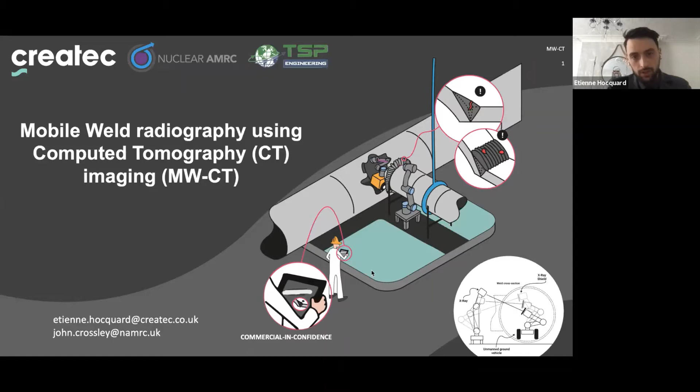Before we get started, I'd just like to introduce a bit the partners in the project, because it was a very close collaboration with AMRC, Nuclear AMRC, for their expertise in NDT and manufacturing. They've participated in the project to provide a set of samples with flaws in the weld - we're talking about weld inspection here - and they've provided all the expertise within the project. We also collaborated with TSP Engineering based in Workington for their very long experience in manufacturing of very high value pieces, particularly for nuclear and all the new small reactor builds and others. They provided their expertise and acted as an end user to the project, and also provided a facility to operate X-ray equipment, which we will talk about in a minute.

Before we get started, also a little word on Createc, who we are. We are a small business company based in Cockermouth, about 30 people, and some of us may know us for this instrument, which is measuring and mapping radiation. We've sent that to places all over the world - it's now one of our core products. But what Createc really is, is a group of people trying to do research and development and innovation for business. We're looking at the problems of the world and trying to come up with new ideas and put those ideas together to make things happen. We've started doing more and more robotics, and that's what we'll be talking about - combining our instrumentation expertise with robotics as well. We're trying now to deploy more and more of our sensing technology and using robotics to act in the world and innovate.

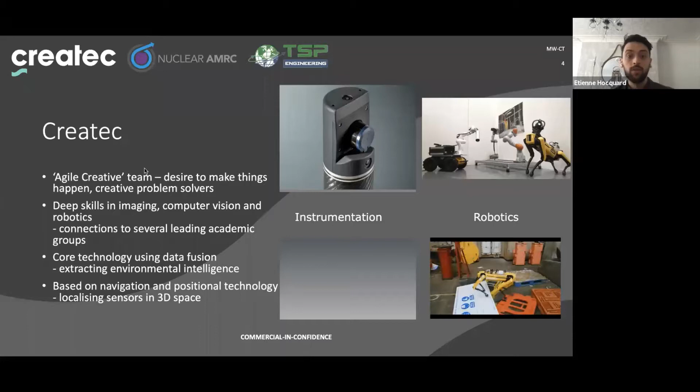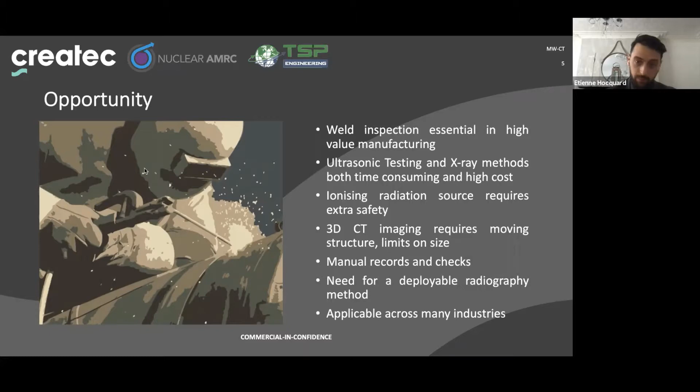So today's presentation is about weld inspection, and really the opportunity came from: how can we make it different? How can we make it better? We've got all those new builds everyone talks about, small reactors, the current build as well, and weld is such a critical part of all this technology. At the end of the day, the quality is very important. And the current technique as of today, which is ultrasonic or simple X-ray imaging, and all those techniques are limited in a way - limited in the sense that they are very disruptive to the workflow. Either you use ionizing radiation and you need to take your workpiece to a specific place, or the other way around - you need to stop all production on site and get people outside of the workpiece so that you can use ionizing radiation to analyze your weld. Or as John from AMRC will highlight, you can use other techniques, but they don't necessarily highlight all the flaws you can find in welds. So we thought, well, maybe we can do it differently, and since it's such an important part of our workflow, let's try to rethink it and see with our knowledge and technology how we could make that different.

So we proposed that project for what we call in-situ deployable - that's a concept again, but the idea is to provide a solution for which we can do CT directly on the workpiece, safely as well, with a robotic solution.

For people who aren't aware, with CT you can get X-ray images where you take a simple 2D image of a weld, and then if you take multiple angles, you can have a 3D reconstruction, which is a CT scan. Everyone's probably aware of CT solutions for brain scanning, for example. It's exactly the same thing here.

So how can we use robotics to provide CT scan directly on the workpiece without being disruptive to the production line? With greater, more controlled safety, which is a gain in productivity, but also being able to provide digital evidence for welds, because at the moment a lot of that is paperwork. We were talking with ONR not long ago, and when ONR or such organizations have to trace a big problem in a weld, in the nuclear industry in particular, but welds can be found in submarines and all sorts of places, when they have to trace back the information, it's all paperwork.

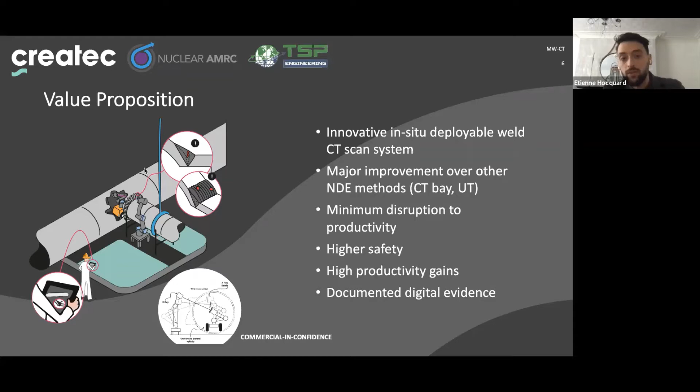It makes the process very complex. So with using digital technologies such as robots and scanning solutions, we could provide very good digital evidence that any end user could give to their customers directly with a weld, such as TSP Engineering, for example. If they were to use such technology, they would do their weld, scan it with the technology, and provide strong evidence of the quality met.

So how did we do that? Well, it all starts with robots to start with. Here's the robotic system we've put in place. I'm going to run through how we approached that problem, how we did our testing, and what we've designed.

We started with robots. You can see this robot, for those who are familiar - they are not big industrial robots, big scale industrial robots. We call them collaborative robots. They've got a couple of advantages for us to use, and that's what we had available at Createc. One of the advantages of collaborative robots is they're designed to be safe to work alongside humans, which means they're also safe to work alongside anything, because basically they stop in case of any collision.

They've got force measurements in all their joints, etc. So if you were to think about deploying such a system on a workpiece on a shop floor, you would want this kind of feature. You do not want to put a complete robotic cell around your workpiece to then do your CT scan. Using this kind of technology made sense to us back then, and we wanted to use that.

However, that's one of the limitations we quickly found out within the project using those robots. They are all well and good, they're safe, you can operate them without any safety fence, and they will stop if there's any collision, which is very useful. But they are very limited in their payload. This KUKA orange robot you see is limited to 14 kilograms, and that's more or less the biggest you would do with a collaborative robot, because then it starts to be difficult to stop in time to not hurt any operators or whatsoever.

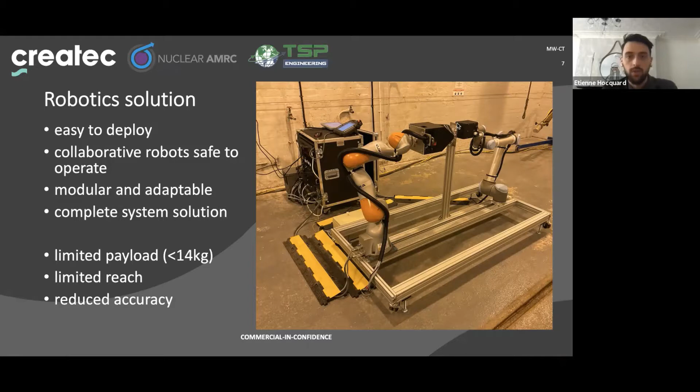So that's the robot part. Then on the X-ray, obviously, to do a CT scan we need X-ray. We need to be able to fire an X-ray onto the workpiece and analyze that afterwards. So we've used this equipment from AMRC.

It's a 130 kV maximum voltage output X-ray node. It's a micro focus type, so bear in mind you get a focal spot size of 5 micrometers. It's tiny, almost like a laser beam.

So it's not spreading. One of the ideas of this project was to try to think of the safety we would have in the future and try not to scatter radiation all over the place. Because if you want to work alongside your operators, you would want very limited scattering of X-ray. So for that, we designed a little collimator.

You can see here, in the hope that we could reduce the radiation scatter. Unfortunately, we didn't have time to test that. This project has been, as everyone has been, impacted a bit by COVID and our ability to do all the experimentation we wanted to do. But we've designed a little collimator, and in the near future we hope to be able to measure how much we're scattering radiation.

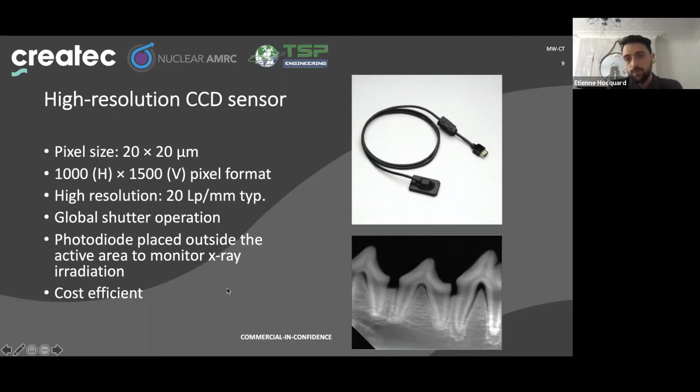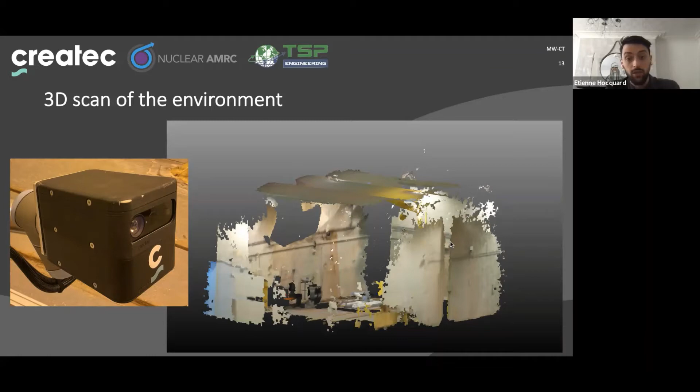Being able to 3D scan the environment for a robot, and for a robotic solution you're deploying here and there in different places, is extremely useful, because the robot must be aware of the environment and its surroundings in order to avoid collision. But the robot should also provide scanning of the workpiece so that the operator can go and select...

Imagine you've got a very long workpiece, 1 meter or 2 meters of weld - you're not going to do everything in one go. So you scan the environment. That's how the process would go: you scan the environment, and once you get your scan, the operator would come and say, 'Oh, I want to scan the weld from here to there,' and the robot will automatically compute all the necessary motion to go and scan that weld piece.

So some mild result on that - the sensor we've been using, which is an Azure Kinect by Microsoft, which is widely used in the industry all over the place for 3D scanning.

It's quite brand new. It's quite good at mid-range, but you can see here at close range, it's a low resolution for us, which is a bit of a problem. So you would need to combine such technology with another type of sensor or with some cameras, etc., to provide very good 3D scanning. But 3D scanning wasn't the purpose of this project. It was there as an example of demonstration, but it's quite well covered in the literature. So we didn't push that technology so much.

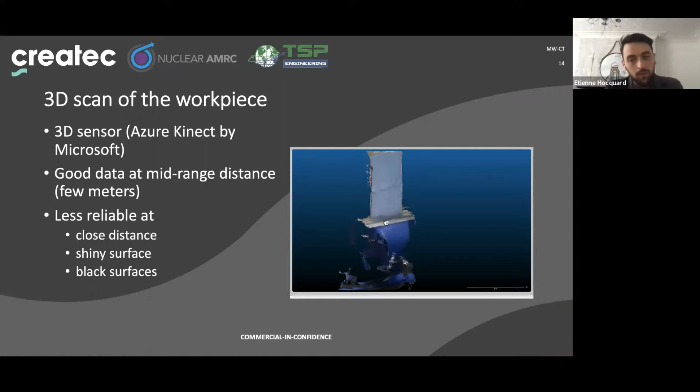So we're dealing with welds. It's little details, but it's quite important when you want to make products. A lot of welds are very shiny, for example, because people are grinding the weld and metal is grinded and polished on some occasions. Because these 3D sensors are laser based, it's not very good for shiny surfaces. That's why we believe it should be combined with other types of sensor to give a very photorealistic option to the operator, so that the operator can see exactly what part of the weld you want to scan.

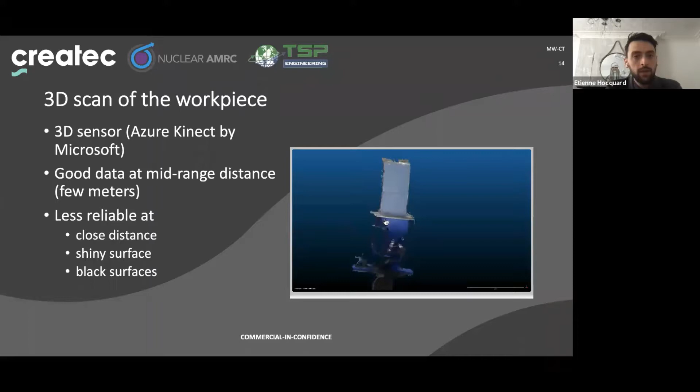Robot calibration. One of the important parts of that project was to get the robots to do synchronized motion, because you want to do a CT scan, right? So you want to go all over your workpiece, and it may sound natural: oh well, they're mounted like that, so they know where they are relative to each other. But that's not true. Each robot is not aware of the other robot. So if you want to make sure that every time you do a motion they align, you will need to make sure they are synchronized and calibrated well.

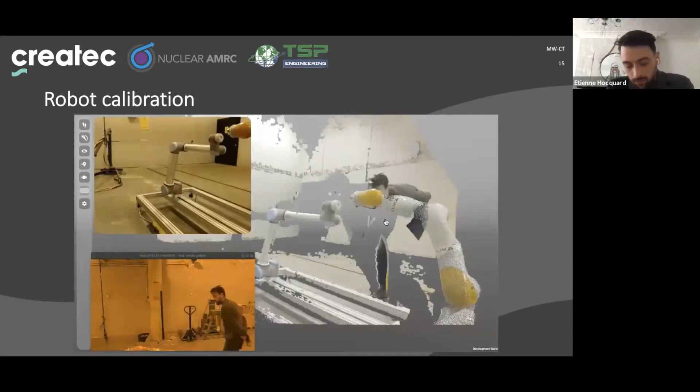There are a couple of ways to do that, and we've used a couple of technologies. One simple solution, which is quite efficient, is to use that 3D sensor to scan the part. The other solution, which is shown in the video here, is to get the robots to touch each other. That's a fairly fast and efficient method. The operator can do that by hand. You'll see it in a minute. You just get the two end effectors to touch each other, and then the system self-calibrates. So two methodologies were developed within this project, and both have been proven valid: touching each other's end effector or self-scanning the robots to each other.

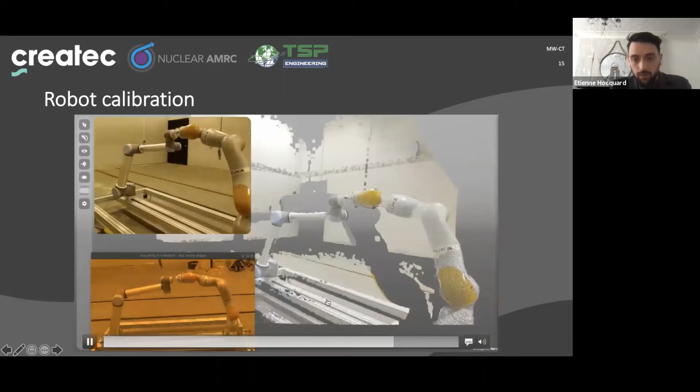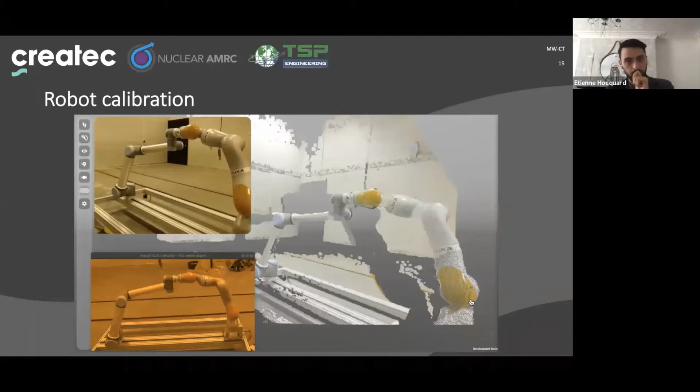So here you go. Thanks to this kind of technology, the operator can literally grab the robot and just align the robots to each other, and then it will self-calibrate. Obviously, because we want very good calibration, you will do that thoroughly and make sure that everything is really well aligned.

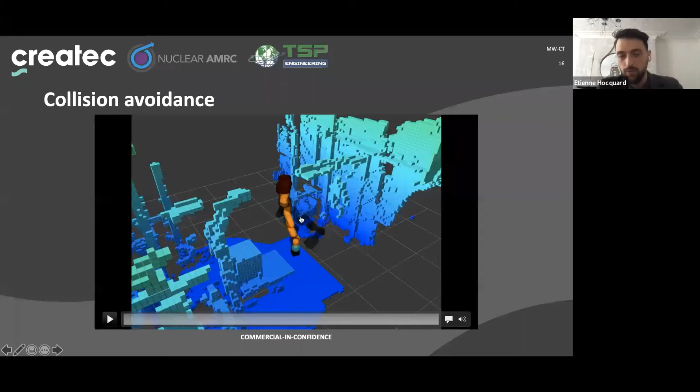Collision avoidance. We've done a bit of work on this: if you want to deploy your robot onto a real case and onto a shop floor, you would want collision avoidance for the robot, just so that you avoid any potential damage. The video you're seeing here is not the same setup. You can see the same robot. We just used a different setup to do the demonstration. A robot was mounted upside down on a gantry, but imagine it would be the same on those two robots.

What you're seeing here is a scan of the environment, but compared to the previous one I showed a minute ago, the idea of this environment is not to be photorealistic so that the operator can have a good idea of the environment; it's an environment for the robot. You can see it's kind of a Minecraft style of environment where the measurements are much rougher. You get those cubes instead of very fine measurements, because technically computing a 3D environment and a 6D motion for the robots to avoid collision is not a trivial problem. So you need this rough but detailed enough representation of the environment so you can avoid collision. What you're going to see here is the operator trying to manually move the object somewhere.

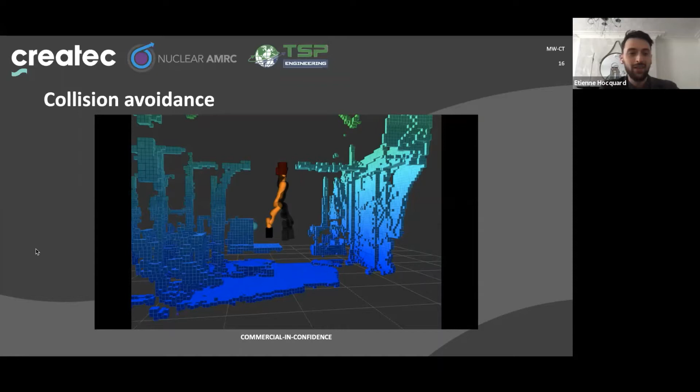Oh, that's not great. Sorry, my computer crashed. Can everyone still hear me and see me? Could someone let me know if you can still hear me, please? I just had a little computer crash. Yeah, it's all fine on mine, Etienne. All fine, great. Thank you very much. Yeah, it's just a little crash.

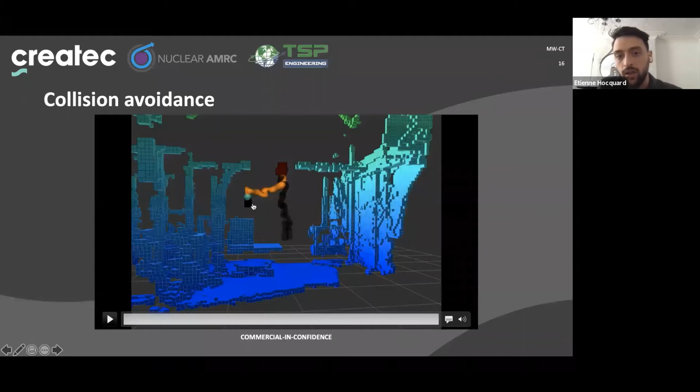So you can see the operator trying to go toward that object, which would create a collision, and the software just automatically prevents it from doing any of that. Oh, sorry.

Synchronized motion. So we got the robot calibrated. The robot can see the environment and avoid collision. So the next step is really to get those synchronized motion within the robots. So the video is not sped up, I think. Yeah.

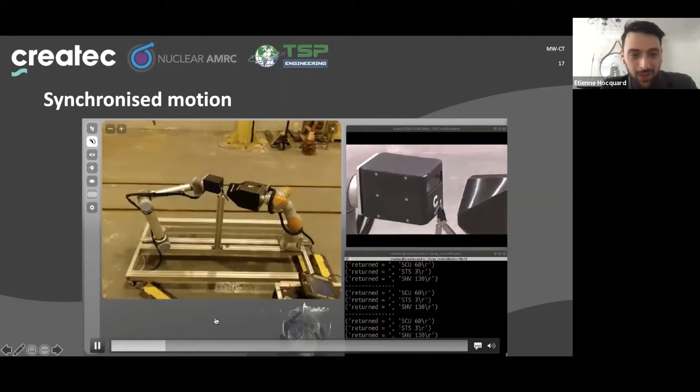The video isn't sped up because simply you would take it when we do measurements of a workpiece. So that was one of the trials where we were looking at the tiny 5p, for example. We do very long exposure, fairly long exposure, and everything is controlled. So sorry, I should have sped up the video a bit, but just to show the example of what kind of motion you would get, and so you would orbit like that around the weld, really.

I'm just gonna speed up by hand, because it's gonna be a bit long otherwise. So you would take different measurements like that around the weld. So here it's done along one horizontal motion, but you would do it in all directions. So you would do up, down, all the angles possible, because one of the ideas to produce the best CT scan possible is to get as many angles as you can in terms of images.

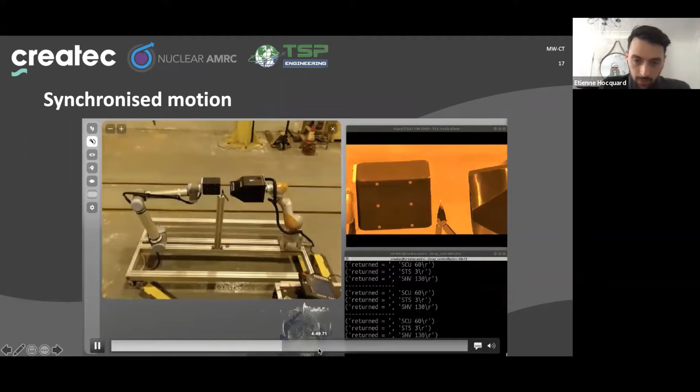So you can see here the robot is orbiting in one direction, and you can see that the robots align every single time, and that's when you will capture an image. So every time the robot moves, they move in synchronization. Of course, they won't necessarily arrive at the same time, but they only capture images when they're both sure they're well aligned. And in the case they don't align, we also got several routines so that the X-ray stops automatically, because that's the worst case scenario.

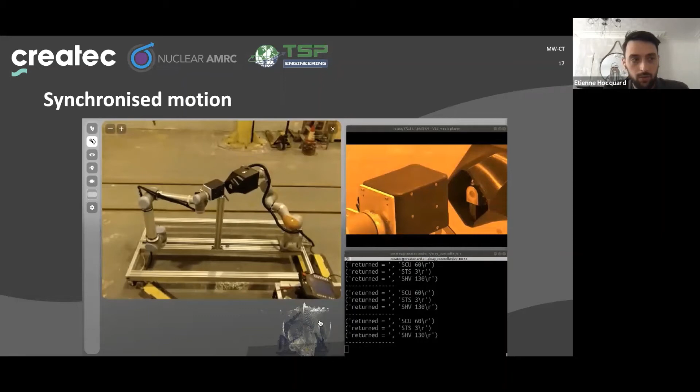Realistically, if you were in a workshop, you've got your detector which captures all the X-ray data here, the X-ray beam, and you try to avoid as much scattering as you can. If your detector, your other robot, would go all awry and just move outside, then you would literally scatter a massive beam of radiation outside the environment. So there's a couple of routines to avoid that.

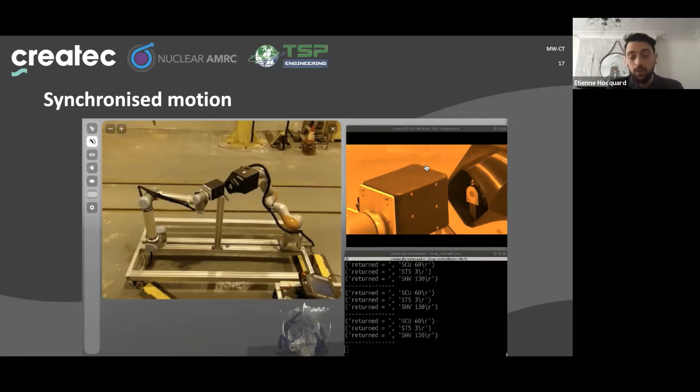We've also designed a little safety detector, but we couldn't test it, unfortunately. So just a little piece of electronics that will cut out any X-ray if it was going outside of that detector. So synchronized motion, so the robot can orbit all around. It can do all sorts of motion. Obviously, we got the constraint of the robot size, which has been a constraint within this project. But once you got that, you can do some X-ray data capture.

So before I show any of the results, I'd just like to highlight that, unfortunately, due to COVID, we had to comply with a lot of health and safety procedures at TSP Engineering. So we had to update all our risk assessments, local rules, and all those sorts. We started experiments extremely late in the project, just last August, for a 15-month project. That's a bit short. Well, that's how this project goes.

I mean, it's R&D. We've developed a lot of things already, and I'll show you a couple of extra results we have. But bear in mind, we haven't finished processing all that data, so we captured a lot of extra data, but we haven't processed all of it yet. And so yeah, just wanted to say that little note.

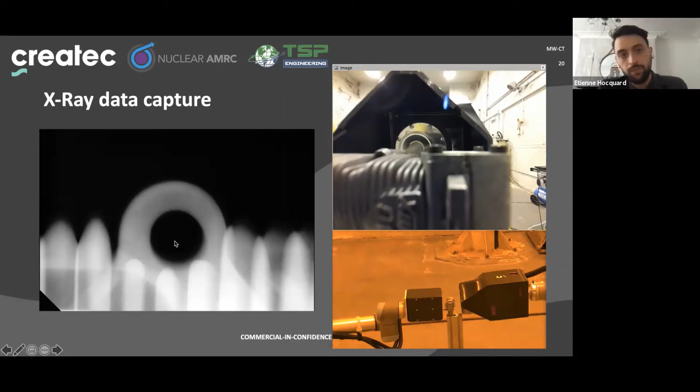So I'm going to show you a few data sets we've taken. So here is a 5 penny, for example. So you can recognize it. It's difficult to interpret an X-ray image. I mean, if we had a CT scan to show, but unfortunately we haven't processed the data to a point where we can provide a CT scan, which we are very sorry for.

Today it would have been great to show you a CT scan of such, but let me explain also why we haven't been able to do a CT scan. We tried, but as you can see, it's all moving a bit around. So it's very fine resolution. So it's not moving that much when you think about it, because we are looking at very fine resolution, right? But it's already a problem to produce a CT scan, because nothing is perfectly aligned.

You would need a sufficient amount of post-processing to make sure that your image is aligned correctly. And what you're seeing here is just a robot sliding off a little bit. So that's only due to all the inaccuracy of the system. So during the calibration process or during this synchronous motion, you accumulate little inaccuracy, and that's the limitation of the

system we designed. We now realize at the end of the project that with a very strong build, we're confident we could do it. Very confident we could produce a CT scan, but we will need a bit of a stronger build than what we are showing today.

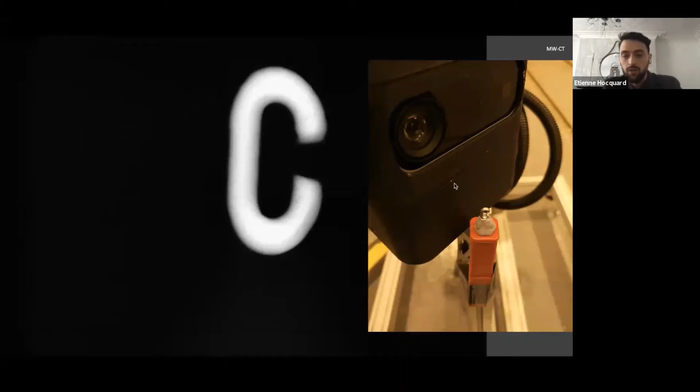So here is another workpiece, just a sample piece. So we're gonna try to post-process the data, but you can see it's basically orbiting around here. That's the image you're seeing. So it's scanning that little C data here. And here another one, well, it's NDT, or more for the purpose of the image, but yeah, you can see that that's the kind of image we have.

So I wish I could show you a weld piece and a weld sample, but as I said earlier in the presentation, that's also the limitation we found out, and that's why we do this R&D project, to learn as much as possible and iterate every time to try and get better, and then get to a final solution. It's really that limitation of payload and robot.

So the source we've been using is 130 kV, but only about 200 microamps. And one of the problems with that is to be able to penetrate a weld. So it will take a very long time, about half an hour with our beam, to just take one measurement of the weld. And given the fact we started experiments in August, we just didn't have sufficient time to take sufficient X-ray images of the weld piece we are looking at.

So a bit of a shame, a bit of a frustration, because we got all this very great robotic system in place and the sensors, but we couldn't get to a point where we get an X-ray image of the weld. But we got data sets to play around with, and those data sets, even though they are sliding off a bit, are very good input for us to look at how we can post-process the data and do the necessary to produce a CT scan.

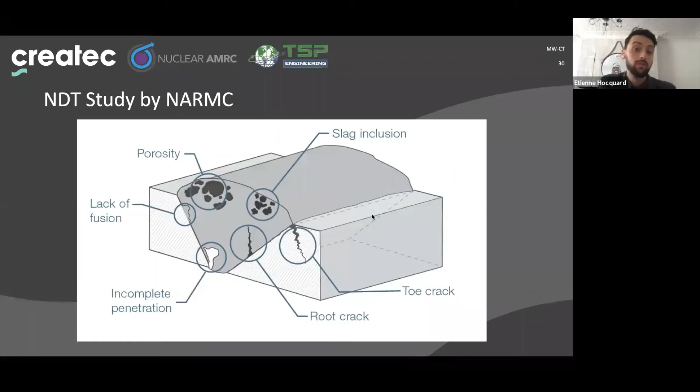But before I talk about the next step of the project, I'd like to invite John from AMRC to talk a bit about the studies they've done on weld NDT, and they've done a very useful and great work at looking at a set of samples with non-defect and all the different NDT methods. And the work they've done can really be used for anyone who wants to do what we've been doing through that project, which is trying to provide new methods to do NDT. So John, I think the best is I go through your slides and you just tell me to move on whenever.

Yeah, thank you, Etienne. I'll just give a quick introduction. So my name is John Crossley. I work at the Nuclear AMRC in Sheffield. We supported Createc on this bid.

The idea being 12 to 18 months ago, we were going to create a system that would potentially be able to go through the thicker section welds that we did here, as Etienne said, the actual test pieces, and the source wasn't powerful enough to get through our test pieces. But that's not to say that these won't be back into service at a bid at a later date, as this system gains traction, and we follow up on that. So if you want to just click on, please, Etienne.

So at the Nuclear AMRC, we looked at creating several test pieces. We created those in carbon steels, and we also created them in austenitics. We looked at the vast majority of cracking mechanisms to reproduce cracks, lack of fusions, laminations, all in small test coupons. As you can see in the picture, that's one of 15. This was a base funded project. These coupons are available to anyone that's got a system that would like to trial out their system. The idea of these coupons is we did the fingerprinting operation across all of them and compared the vast majority of current capabilities here at Nuclear AMRC.

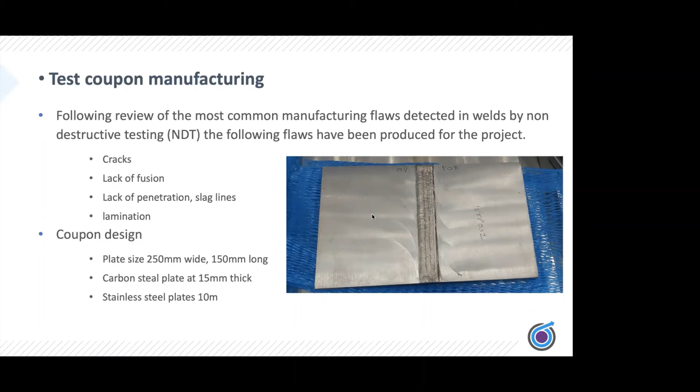It was unknown to myself at the time. We didn't know if, say, ultrasonics would always size a flaw slightly longer, or obviously it's known within industry that TOFD is really good for flaw height detection against phased array, which is not as accurate. But we're only talking tenths of a millimetre. But if we just click on, Etienne,

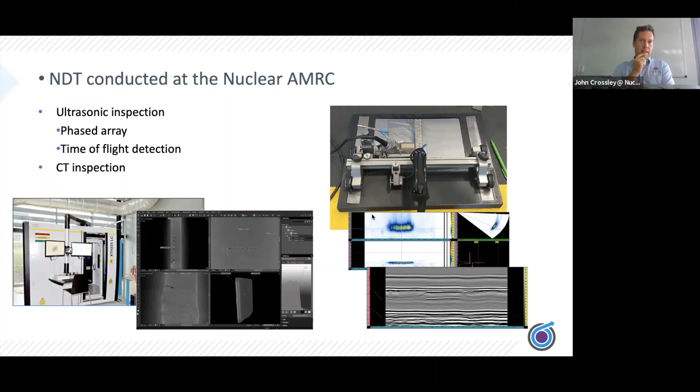I think on review of the data, there were certain things with our scanners for ultrasonics. I don't know how many of you are aware of ultrasonic scanners and ultrasonics, but as you start to scan a test piece, before the encoder kicks in, you have a little bit of flex in different scanners. So I think maybe there are some things to look into there to make sure that the flex is always taken up. But again, we're talking really small discrepancies for the types of flaws that we've been looking at.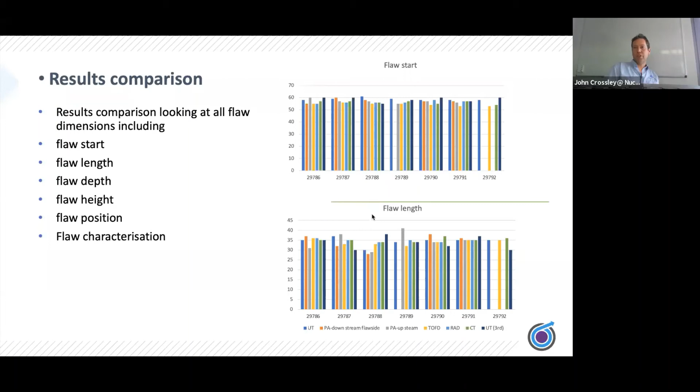So like I say, I'd like to thank Etienne at Createc for working with us, and also TSP Engineering, who are not on this presentation today, but they provided the facility in which Etienne was able to conduct his experiment. And that sums up my presentation. I'll hand back to Etienne, and thank you all for your time.

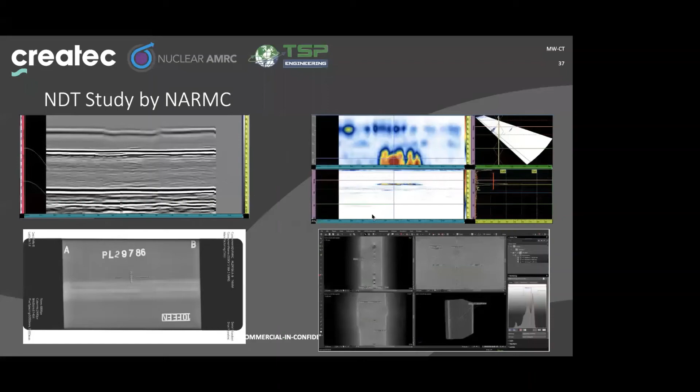Thank you, John and Etienne. If anyone has any questions. We had a bit of a conclusion, if you don't mind. We weren't able to finish the presentation, sorry. Let me stop my video again, sorry. Yeah, there's a bit of a conclusion, and we've got a little video.

Thanks a lot, John, for all your work. Createc has led the project, but my conclusion really is that by collaborating with all this range of expertise, from end users to people like AMRC with expertise in manufacturing. It's not only NDT, they've got a whole bunch of welding machines. That's a very impressive workshop, I must admit. And people like us who try to innovate, it's really combining all these forces together, learning to work together and bringing different expertise. That's how we do innovation. That's how we did this project, and it has been really wonderful.

One of the great outcomes of this project is that now we have very close collaboration with the Nuclear AMRC and TSP Engineering, and the work we've presented is only a start for us, and that's really the great learning. We haven't completed all the results. We haven't done everything we wanted to do, in particular regarding the CT scan, measuring radiation scatter and the safety system. But we've learned a great lot, and we know exactly what the next steps are for this project to carry on, and maybe see the technology happen in the real world one day.

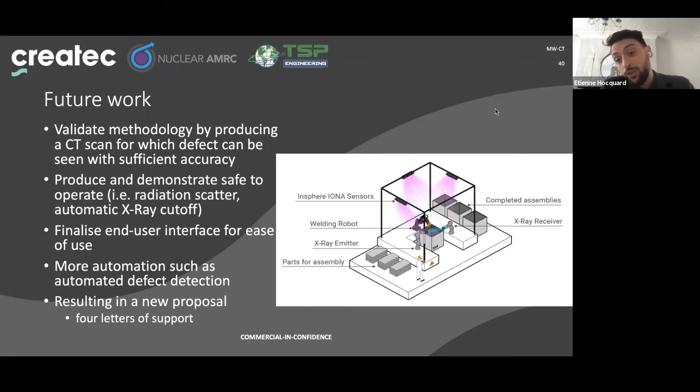So we haven't got the proposal in yet, but we received 4 letters of support from the end users, and hopefully we'll be able to carry the work with Nuclear AMRC and this company based in Bristol called Insphere, which does external tracking. So it's a UK company doing external tracking, and we'll be looking at using this external tracking to prove the safety of the system.